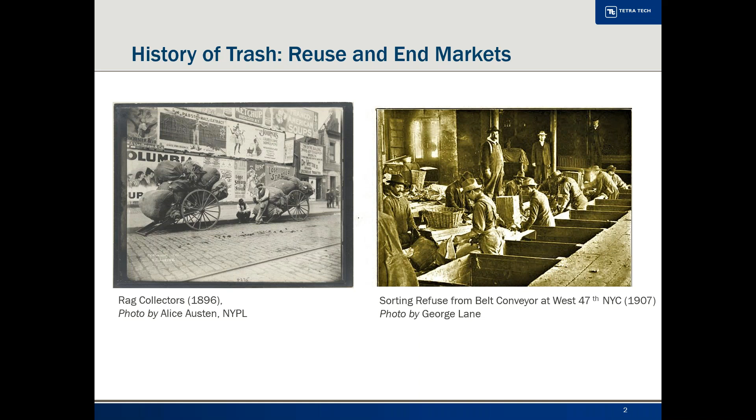Of course this wasn't sanitary, and cities implemented sanitation services to manage solid waste. I'm obviously simplifying the journey here, but I just want to take us to how paradigm shifts in solid waste management have occurred over time.

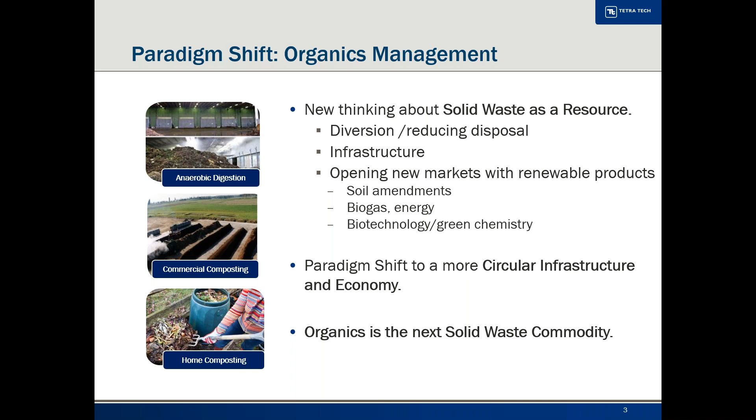More recently, landfilling and waste to energy have been long-term, cost-effective, and environmentally compliant solutions for the management of waste. And while we continue to have these waste solutions, our paradigm for materials management continues to evolve as markets shift and new technologies become available, allowing us to realize an even greater fraction of value from resources that are discarded, bringing us to a more circular infrastructure and economy. Organics is the next solid waste commodity.

The US EPA recently updated their 2018 Advancing Sustainable Materials Report in November of 2020, and I want to touch on a few facts. Americans generated 292 million tons of trash, and of that trash, the organics fraction, food waste, was 21.6%, and yard trimmings, yard debris, was 12.1%. The EPA also reports that the commercial, institutional, and residential sectors generated 63 million tons of food waste.

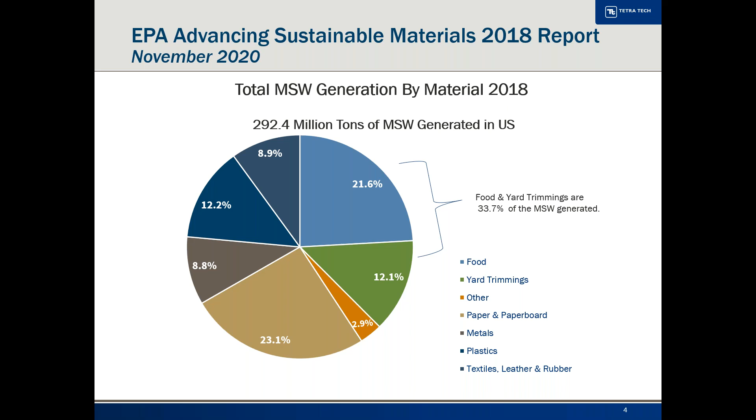When we look at the management of waste, only 25 million tons, or 8.5% of materials, were composted. In addition, 18 million tons, or 6.1% of wasted food, was processed through other food management pathways, including donation, animal feed, land application, co-digestion with AD, sewer, wastewater treatment, and bio-based materials, chemical processing.

In 2018, the EPA included these 6 pathways to capture the flow of excess food and waste through the food system. So this trend in managing food waste opens opportunities for organics involving the collection, pre-processing, and management of materials for these additional pathways.

Still, I do like to point out there is a significant amount of food waste that remains trapped in the municipal solid waste stream. I also would like to point out that the solid waste infrastructure requires a portfolio of organics management systems, including more composting systems, as there is a significant need for compost as soil amendment products for beneficial use and human and environmental health reasons. I'm happy to discuss that topic at another time, if that's okay.

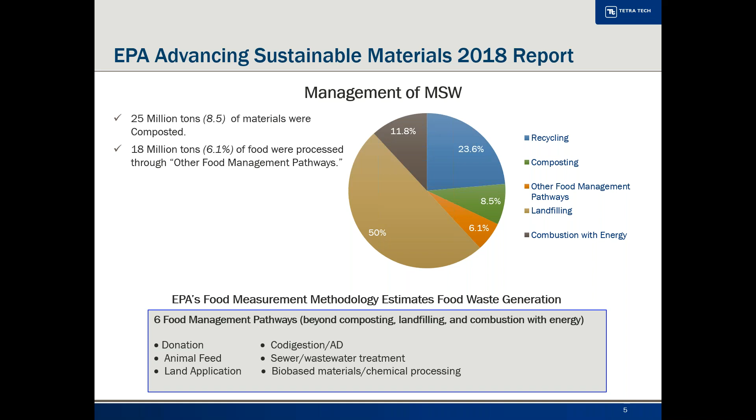Legislation is really a key driver of organics management and the need for organics infrastructure. As of December 2020, there were 21 states with yard debris bans from disposal in landfills, and 4 of these states have exemptions for landfill with gas collection systems. These are Florida, Georgia, Iowa, and Nebraska.

8 states have an organics recycling mandate or legislation for diverting food scraps from landfills, with New Jersey being the most recent state to adopt a food waste diversion plan. Certainly as states and municipalities aim to implement zero waste strategies, organics is one of the primary materials to divert from the solid waste stream.

Even for locations that have addressed recycling or made other progress, organics often are a largely untapped area. Throughout our Northeast region, regulations are focused on diverting organics from landfill, with the target being commercial generators, except for the state of Vermont that has a universal recycling law that includes all food waste, residential is included.

With our problem of decreasing waste disposal capacity and increasing costs, both the public and private solid waste facilities are looking for ways to divert organics and be more compliant with these emerging commercial organics bans.

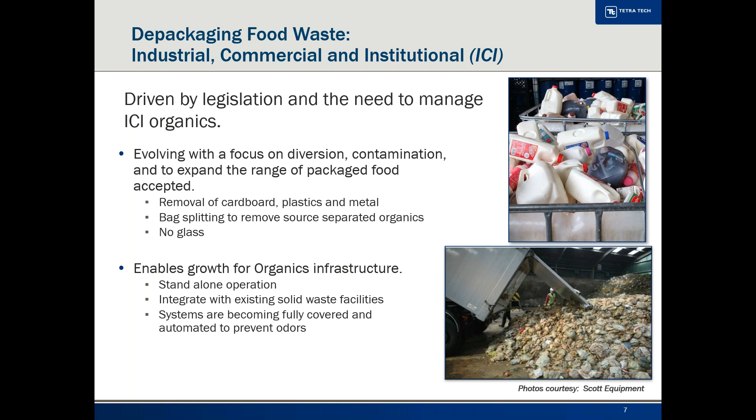So depackaging, what's its role? It's a pre-processing step. It eliminates the need for manual labor and helps eliminate waste.

It's difficult for commercial generators to source separated food for many reasons, like employee turnover, training, lack of space, time consuming to open up product and packaging, the yuck factor, just to name a few.

But depackaging helps keep contaminants out of the feedstocks that are aimed for wet anaerobic digestion systems, where food waste slurries can be pumped into wet AD systems.

Depackaging can also pre-process feedstocks aimed for composting operations, where the food waste particle size can be reduced for mixing with other feedstocks. So it minimizes the contaminants entering organics recycling facilities that can take in commingled source separated food waste from the commercial sector, as well as residential organics diversion programs.

And depackagers can average between 90 and 99% recovery rate, depending on how much food remains adhered to the packaging after separation.

So what I find very cool, of course, is the process itself. It needs to be designed for the right application. And in essence, there are two streams of materials that need to be managed.

This next image here actually shows the two waste streams. You've got your organics and you got your packaging after the separation process. And the organic stream looks very clean, as well as the packaging waste also looks clean for recycling.

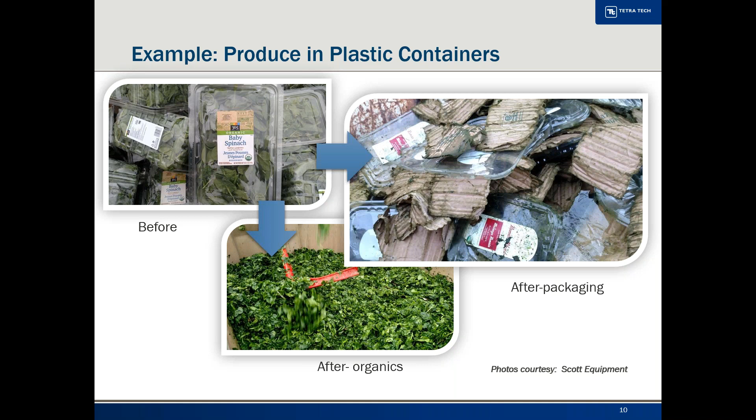So how depackaging works? Let me just start with, there are both American and European companies that offer depackaging equipment to the US market, and many are focused on the anaerobic digestion industry to make contaminant-free food waste slurries that can be pumped into wet digesters.

And nearly all packaging is considered a contaminant, including certified compostable products, film wrappers, and bags. So it's removing the pre-consumer food or liquid from its packaging, which is the separation process.

And as I mentioned a little earlier, there's two product streams. You got the organics material and you got the packaging. And these systems are modular and they can be based on customer needs.

Systems can handle small to large volumes, I believe up to 200 tons per day, but I bet our next two speakers can speak more about that.

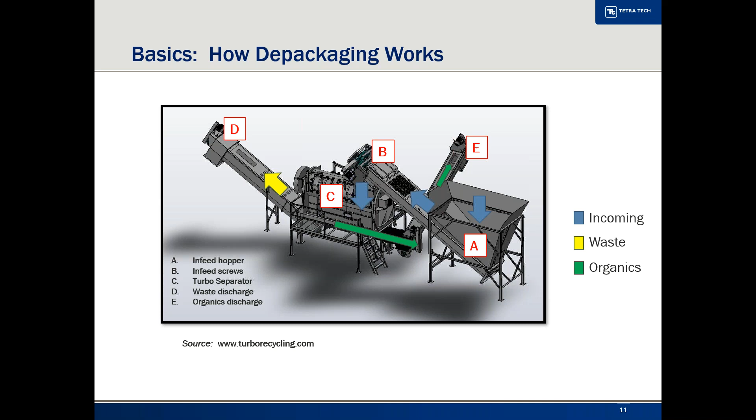So integrating organics management into existing solid waste facilities or as a standalone operation really requires understanding of the market, from feasibility studies, analyzing feedstocks, beneficial end-use markets, through designing your system layout. All of this will drive the engineering concepts and implementation of organics recycling or other types of organics management systems.

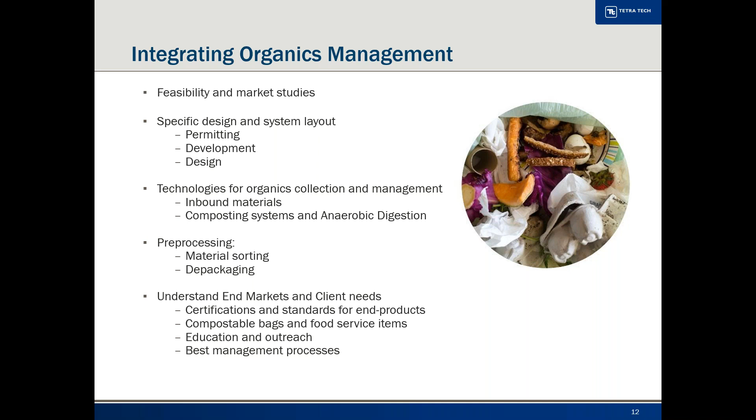And this is exactly the type of work that Tetra Tech can do for any site and client. And this is just one example of a tool that I like to share with clients just to help visualize the potential flow of feedstocks.

Clients like to walk through this flow chart to understand feedstocks, different types of technologies, and how material can flow through systems, produce products for the right end-use markets.

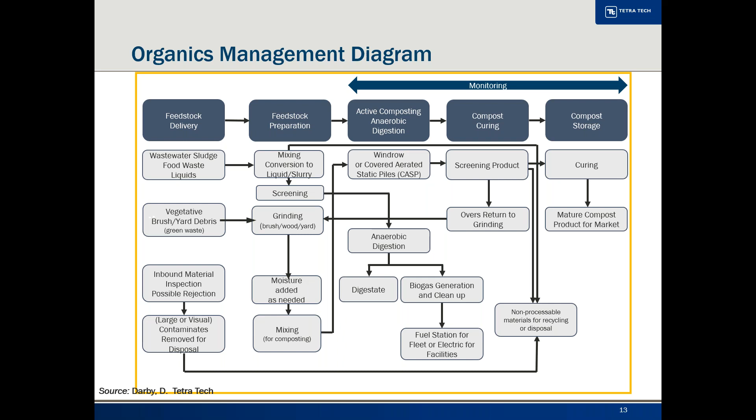And then in closing, I always like to give a kind of a Deborah Darby perspective. There's a growing interest in developing organics infrastructure.

Private and public entities need to collaborate to pivot public thinking around and toward a circular economy and a more sustainable flow of materials. And this involves changes in public behavior in terms of consumption and disposal, where food waste is recycled back into the market with high value use through composting and anaerobic digestion.

And there's many considerations in the planning, development, and operation of organics management facilities. These include siting, state and municipal regulations, permitting, available feedstocks, and population density and commercial demographics surrounding neighborhoods and businesses.

All of these factors provide meaningful data in determining what type of an organics project is needed to service an area. And certainly most projects are scalable when they're designed properly.

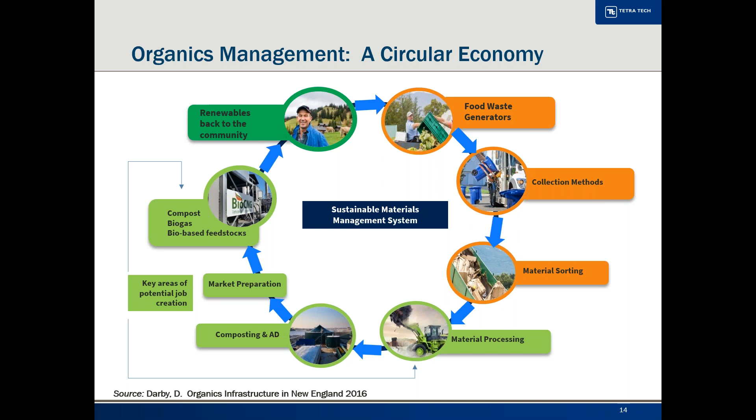Thanks, Deb. That was tremendous. And of course, we are receiving a lot of questions. And they're extremely interesting questions. And if it wasn't for the fact that I said we were going to hold questions, I'd be asking you questions. So let's just say that. I am noting the questions. We'll get to them towards the end.

Brian, let's see. I can see your presentation, and thank you so much. And I'm looking forward to it.

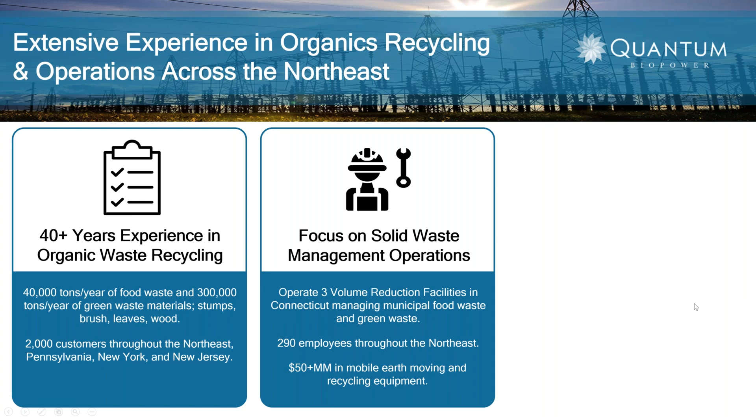We always joke we probably have more equipment than manpower, so talking about depackaging equipment is right in our wheelhouse. We certainly have our fair share of experience with equipment, and depackagers certainly fit that bill. At the end of the day, we recognize that it's the partnerships that really drive the bus for us, whether municipal or private.

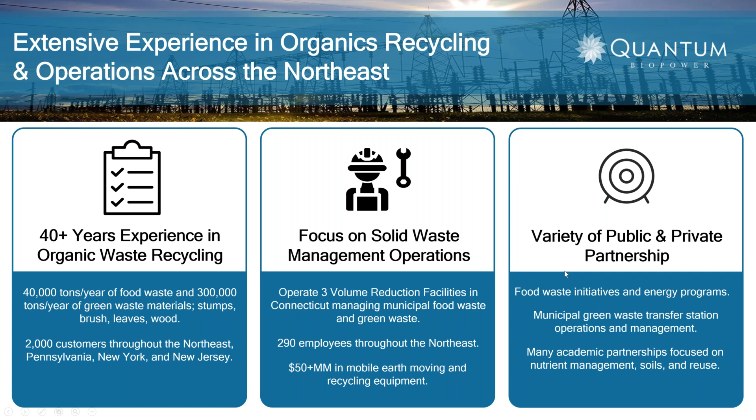We're a company that relishes those partnerships because we believe the ideal goal for all of our customers and partners is to have a win-win situation. Part of what we do at Quantum has certainly invoked that.

Being organic waste recyclers, in 2015 we set out to develop what amounted to one of the first industrial scale food waste digesters in the state of Connecticut. This facility processes roughly 40,000 tons per year, making a little over 1.2 megawatts of renewable class 1 power, diverting roughly 5,000 tons of CO2 by recycling methane and creating compost at the outset.

To give you a bit of scale about this facility, the tank you see in the backdrop is roughly 60 feet tall by 40 some odd feet wide.

The operations building in front of you is 120 by 60. The facility is fairly inaudible from 50 feet away, and there are no fugitive odor emissions. We have a pretty sophisticated air capturing system inside the plant.

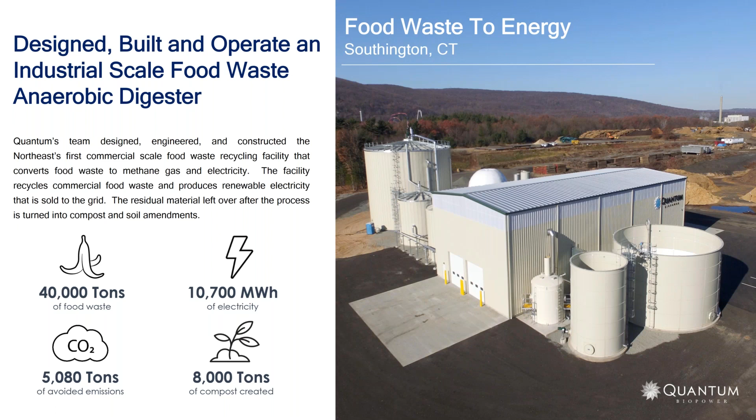This was all part of the design process to show that we can site critical food waste infrastructure in areas of population density. There was a lot of deliberation. We worked very hard to keep this a clean facility and to demonstrate that you can recycle food waste in a very clean manner.

The digester is part of a larger organics campus that we call an eco park, located in Southington, Connecticut. Most of this land is privately owned by us, but 20 of these acres is sited on top of our community's local expired landfill, where we manage our community's leaves in exchange for operating on the landfill space.

There's digestion operations happening, composting operations. We're receiving a myriad of food type waste products, which we'll talk about. There's composting on site, and we're producing biogas, electricity, mulch, compost, and soil at the outset. We also have about a megawatt of solar on this facility.

And we're preparing to bring in some storage capacity for electricity in 2021. A few years ago, we began operation of a green waste recycling center in the town of West Hartford, much of a similar arrangement. We manage all of the town's local green waste needs.

And then we're helping them to reimagine this site, actually this year. We're planning on building a new waste processing center at the end of this year, which will have more sorts of diversion equipment such as depackaging, also some fueling stations and other renewables integration.

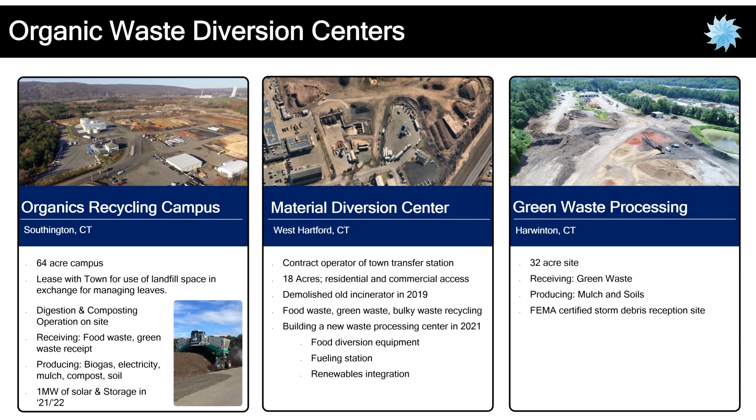And our final site is in Harwinton, Connecticut, in Northwest Connecticut, where we are processing a lot of forms of green waste that we turn mostly into mulch and other products.

So in talking about this decentralized waste approach and building this sort of hub and spoke concept around managing organics, our business is quite simple. We're taking in pre and post consumer waste streams, things that have not been consumed, food waste materials that have been consumed and maybe scraped off of a plate, food waste materials that come from packaged goods. We also have a pretty healthy intake of green waste materials.

We're processing these materials on a variety of our sites, and we're producing soils and biogas and mulches and compost. Those materials are being received and transacted with a number of our customers. We sell all of our electricity from the digester through Eversource to our host community, who gets the benefit of our power. We're powering our community's wastewater treatment plants, their municipal building, their fire station and police station.

And if you've bought a bag of Scott's mulch or bought a bag of mulch from Walmart or Agway in the Northeast, odds are some of our material is in that bag.

So in the world of reuse, this is probably the part of the picture that we're most excited about. It is this whole story about harvesting nutrients from organic substrates like food waste, and then turning those materials into organic compost blends. We took a pretty substantive step in 2019 to that end and launched a product called NutraGrow.

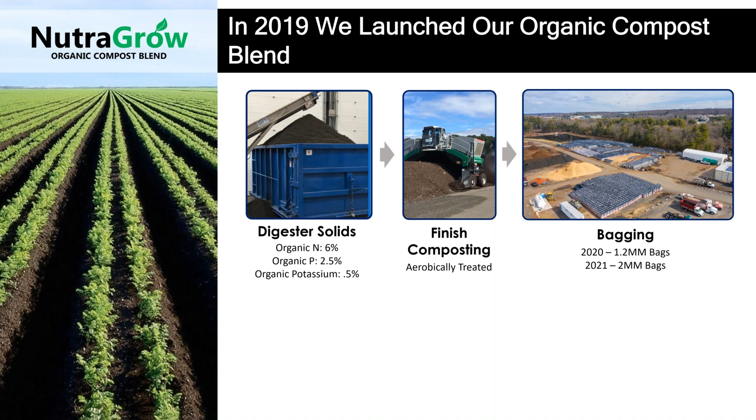Last year we did about a little over 1 million bags. This year we're on pace to do about 2 million bags. So for us, we see the value in the future in harvesting those nutrients from food waste streams.

Thankfully, we have some really smart academic partners in our state. So we undertook about an 18-month endeavor with the Southern Connecticut State University Agronomy Lab, and we were able to demonstrate some real results around using organically driven nutrients in a compost blend.

What we found was that we found stronger crop yields when using organic compost. We found stronger plant rooting and vigor. And when you use other materials that harness nutrients, other ingredients in compost blends that also can keep hydration within a soil, we found that compost was less susceptible to drought and also delayed nutrient uptake, almost creating this delayed nutrient onset for more plant growth.

So we're very excited about the future of organic soils and how that sort of plays in unleashing those nutrients from food waste through a digestion process.

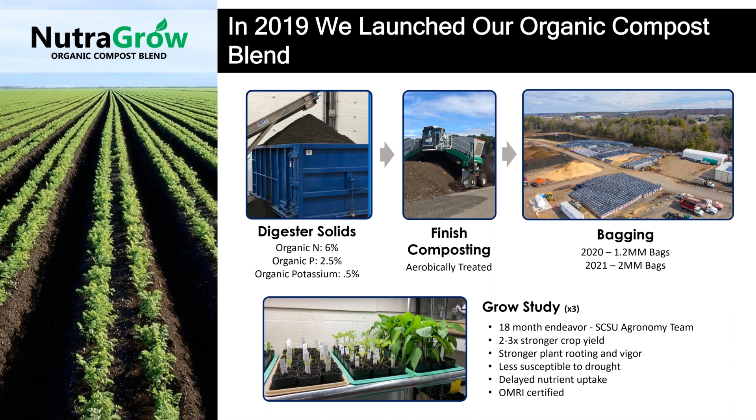So now we're applying a lot of that learning back into the food waste space. We've got all this carbon and nitrogen, and when we put these things together, we make a really great compost blend. What we've learned is that when you look at the digestion process, it's great to make biogas, but we're also looking at ways of getting those nutrients in a more readily available fashion. So just to give you an example, about 700 pounds of nitrogen is produced from our digester on a daily basis. And that's nitrogen that could be used in a compost blend and brought back into the growing cycle to help support future growing within the state and within the Northeast region.

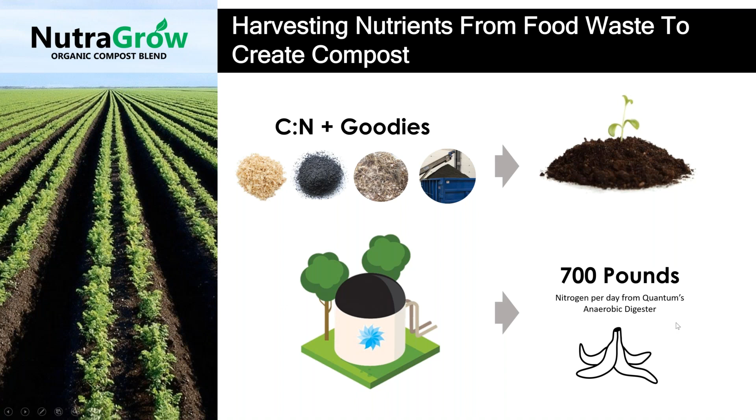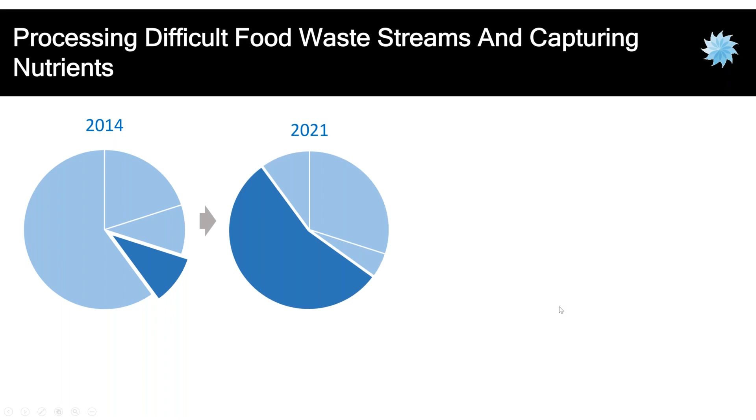So the question is begged, what does this have to do with depackaging? We're going to get to that point because what we're finding is that in 2014, when we sought to develop this project and this digester, we had a vision for what food waste was and what food waste could be. That vision dramatically changed over time. And what we're finding is that there's a disproportionate amount of what we call unconventional food waste in the marketplace. Unconventional food waste is food waste that might come in packaging, difficult to recover organics, high strength food waste, or other non-traditional food waste streams.

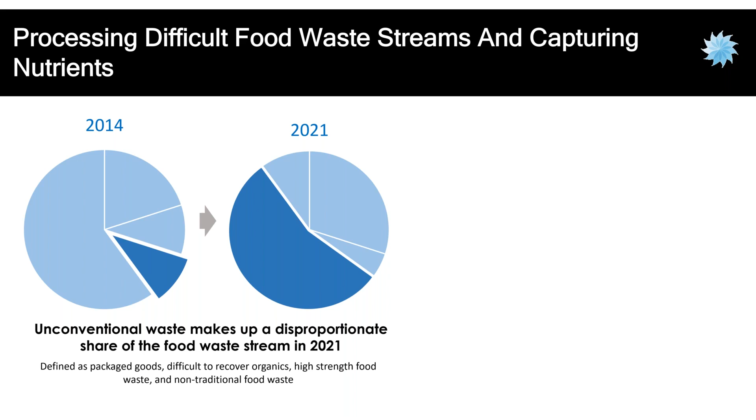Again, in the mode of learning as the market is evolving, as I'm sure you all are learning as the food waste market is evolving in your geography, this was a big learning for us. And it was important for us that as we started to trend towards looking to not only make biogas from food waste, but harness those nutrients, that we changed accordingly.

So we spent a lot of time in the past several years developing algorithms and developing processes that categorize and catalog food waste, because not all food waste is created equal, whether it's a can of Campbell's soup or a bag of romaine lettuce. There's different energy content and nutrients in these substrates. And if our goal is to make good biogas through our digestion process, keep our digester healthy and strong, but also recover the nutrients from food waste, then it's important to know what's going into this process. So we've spent a lot of time going through that process.

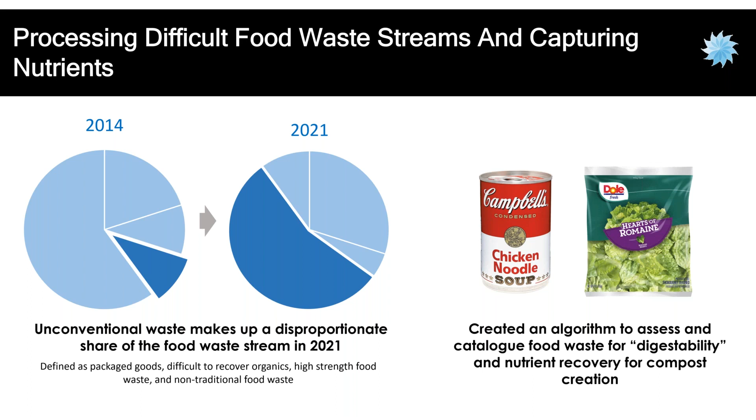And obviously, looking at unconventional waste, we tried to now apply process technologies such as depackaging and organics recycling to that end. And we're going to give this a shot. I can't guarantee this is going to work, but this is a short video that we've created about our depackaging facility.

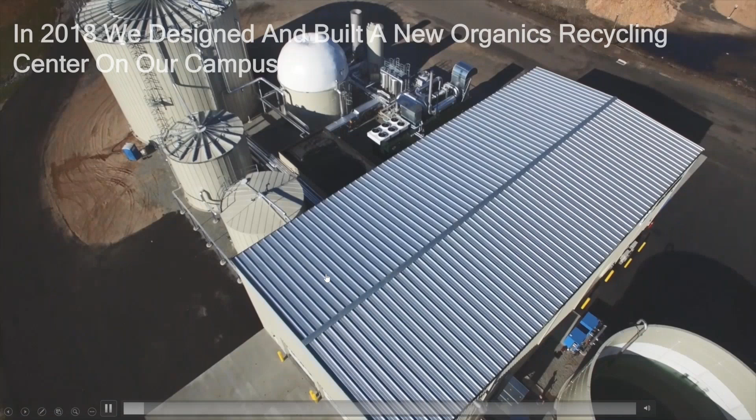You can see that this facility is adjacent to our anaerobic digester in Southington, Connecticut. All the energy utilized from this facility in our organics recycling center comes from an anaerobic digester located on campus. We have six drive-up loading docks for folks to drop off material. And as you can see, there's a variety of material that comes into this facility, whether it's in a bottle or it's in a can or it's in a piece of packaging. We have the ability to offload those materials in a very short amount of time.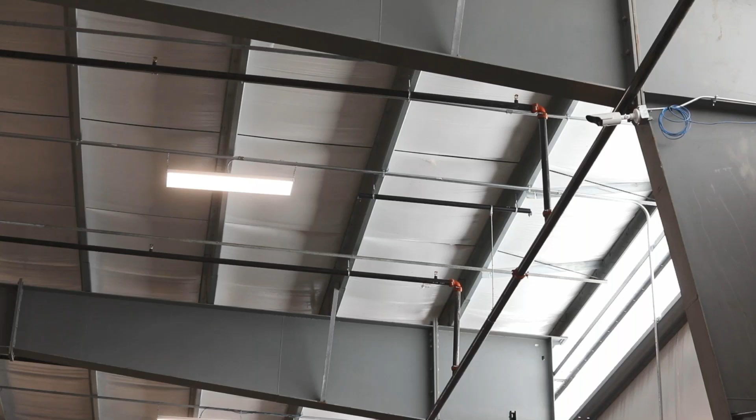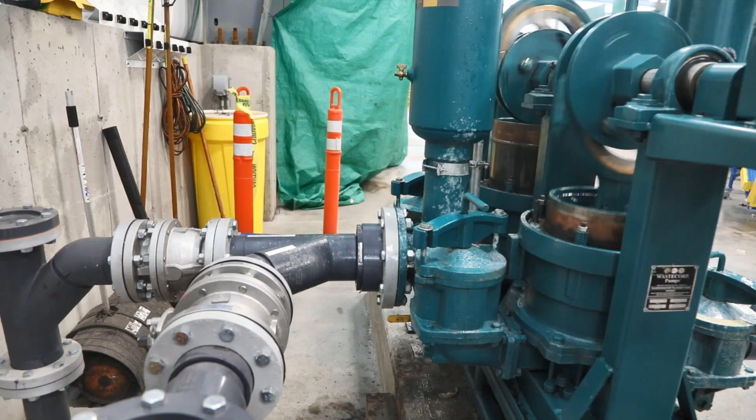Simply, all we're doing at this facility is separating food waste streams from their packaging, recycling the food waste that gets sent into our anaerobic digester, roughly 100 feet away, and then recycling as much of the packaging as we can to make sure we're minimizing the residual materials created from this process, such as packaging, cardboard, aluminum, and plastics. As you can see, a bale of plastic running by the screen right now, and doing our best to create this comprehensive recycling process here at Quantum.

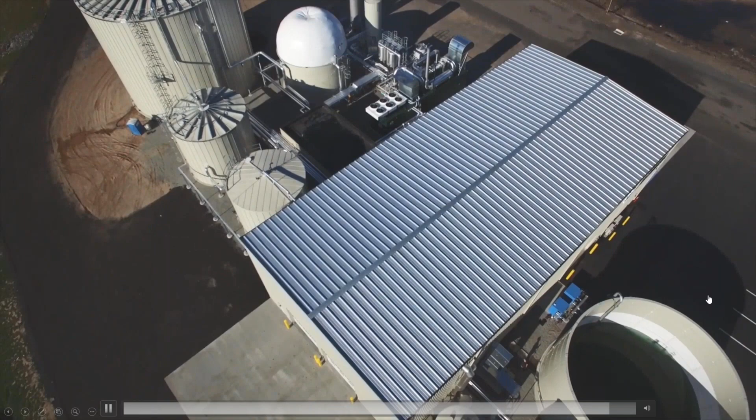So I hope that showed up a little bit on your end. We'll see. Okay. All right, next slide. There we go.

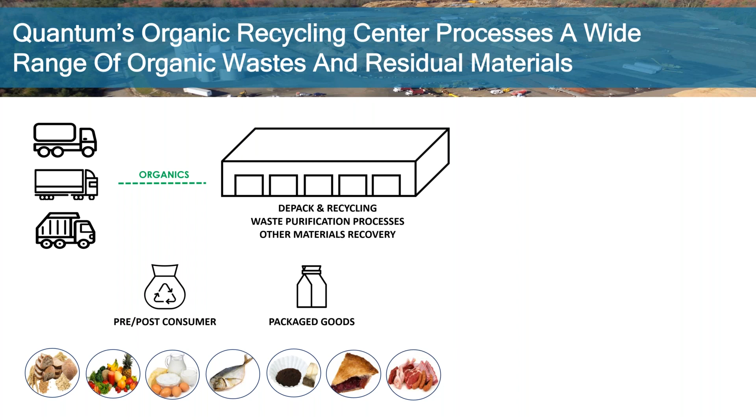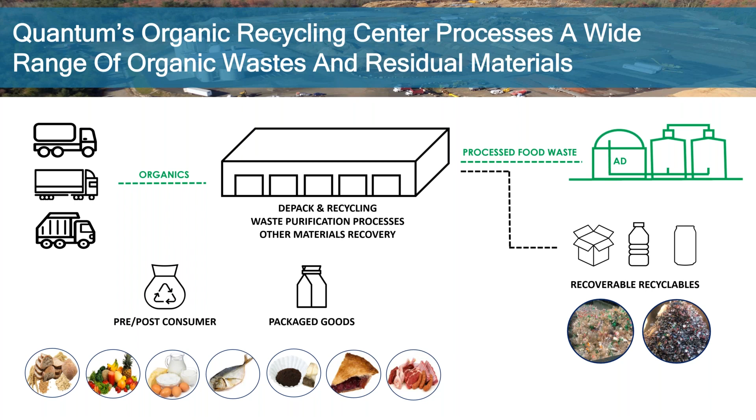Okay, so just to give you the quick rundown on how we're looking at depackaging: we take a variety of trucks here at the facility. It could be tanker trucks, tractor trailers, or traditional rear pack garbage trucks. We're taking in a variety of organic substrates, whether that's in a compostable bag or in a package. We're recycling those materials, separating the food waste. The food waste goes to digestion on our campus, and we're recovering as much of the recyclable materials as we can in the form of cardboard, plastic, or aluminum, and then bringing those materials back into the recycling marketplace.

From a municipal perspective, as we're all aware, diversion goals and disposal pricing are rising, disposal capacity in certain geographies is decreasing, and recycling markets are depressed. As we create decentralized means of recycling food waste and other unconventional waste streams, we're helping to shore up that gap between what's really happening in recycling and what the diversion goals are in a given state. On the private side, roughly 80% of Fortune 500 companies have sustainable development goals.

But only about 20% of those companies are making meaningful progress towards those goals. So if we can offer a solution to folks trying to do better at recycling those organic materials, using a process like we have in an EcoHub or EcoPark campus, we're helping private customers achieve those sustainable development goals. So really a public and private benefit through one facility.

It's our commitment to whomever we engage with our partners that we're always trying to track and report back sustainability metrics, whether that's quarterly or yearly. We're always trying to report progress back to our customers to let them know how they're doing, how their diversion rates are achieving, what their efficacy rates are, and the environmental impacts of diversions per customer.

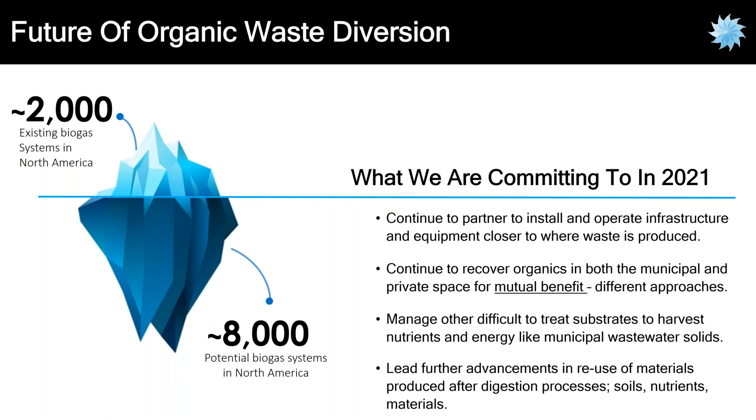So again, I thank you for your time today. Thank you for being patient and attentive, and I'll throw it back to you, Lynn.

Thanks, Lynn. So as Brian and Deb talked about how we do the voodoo that we do, I'm going to talk a little bit about why we think it's so important and critical, not only at the commercial level, but at the institutional and municipal level.

I think everyone knows there's a real concern with food waste. I don't imagine most folks understand that 40% of all America's waste is organic materials. One of my favorite factoids is that if food waste were a nation, it would be the third highest greenhouse gas emitter behind China and the United States.

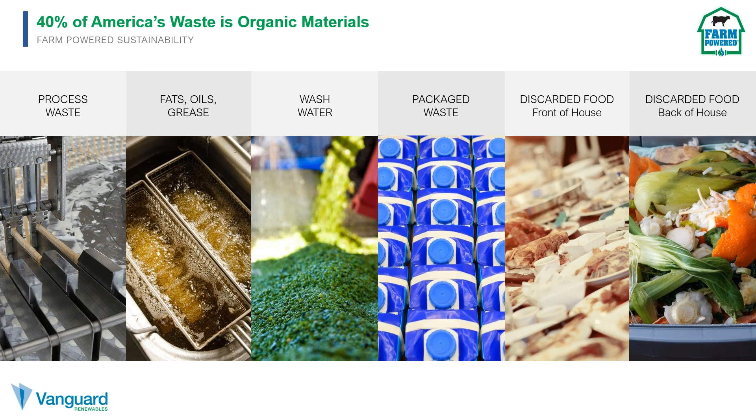What I think is critical is understanding this can be done at scale. When we started the company back in 2013, we spent a lot of time looking at Europe, the UK, and Canada, which are candidly a decade to two decades ahead of us in recycling food waste. It would be unheard of if you were in a German household that you would throw your food waste into the trash. That's inconceivable to them. It's a goal we hope we can achieve here in the US, that same recognition of the value of food waste.

For us, first and foremost, it's recycling it and sequestering that methane. But the second part is being able to work with farms. All of our food waste ends up, it may start in many different forms, but it ends up on a farm, and being able to use it first to remove that gas and put that back into constructive use, but then also to take the byproducts.

Brian has shown a couple of models as to how they can use it in fertilizers. We use it as organic fertilizer for all of our farms as well. The ability to return those nutrients that otherwise would end up in a landfill or an incinerator, and redeliver them to the soil where they came from, is the most important circularity we can bring to the American agricultural system and to all the food manufacturing partners we have out there in the US.

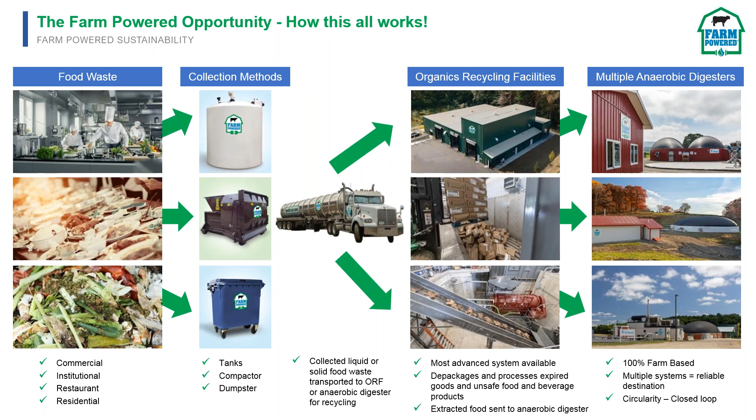What's so important to us on the digester side is closing that circular loop. If we can take a pint of off-spec ice cream, extract the gas, send that back to the factory that made the ice cream, then take the wonderful organics that come out the back and bring them to the farm, grow the hay, corn, and alfalfa we feed to our cows, and deliver that milk from the cows back to the ice cream manufacturer—that for us is something really unique in the United States.

But it doesn't have to be. It's something we think should be commonplace. If you look at what has occurred in Europe and the UK, that circular energy loop, that circular nutrient loop, is something that's a daily occurrence. We believe the way to empower that is by making it easy and simple for any municipality, institution, or commercial food manufacturer to take that food waste and put it back into beneficial reuse.

What we see, and I think Deb talked about the yuck factor—I agree with her completely. It is daunting to see 700 tons of food waste, which is what we collect about a day in New England. But it's remarkable to us. Paraphrasing it, it smells like money.

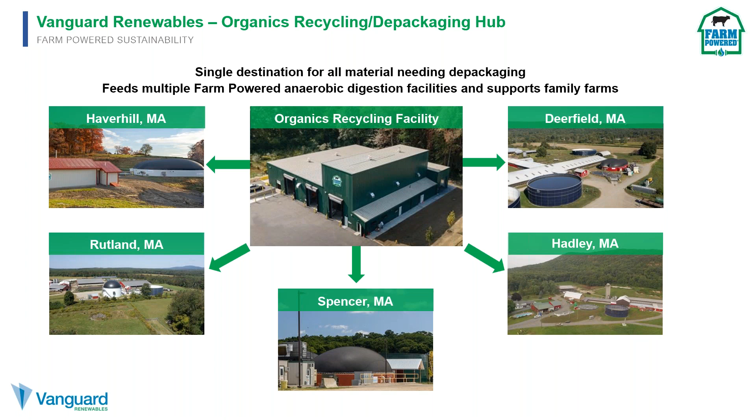That is my presentation.

Thank you, John and Deb and Brian, really tremendous. I am going to take it away from you.